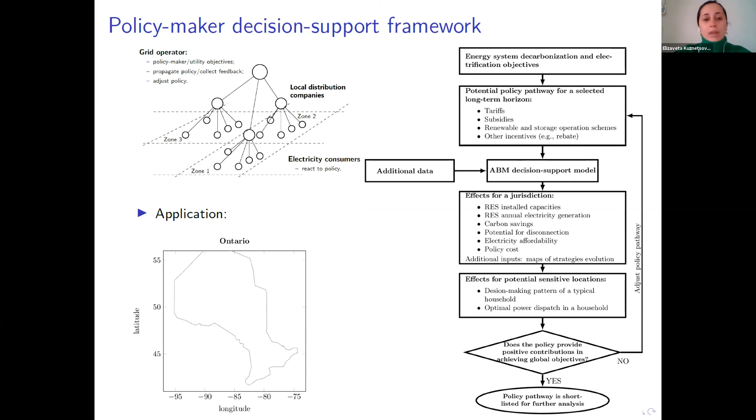For this particular study, we will focus only on the bottom level of electricity consumers, because the policy definitions and adjustments will be done by ourselves manually. The application will be presented for Ontario.

Each household is simulated as an individual agent who uses various inputs, starting from tariffs and the trends of these tariffs for the next years, technologies, and investment conditions.

We have the technical specifications of various technologies, environmental conditions where a household is situated, and operational conditions if we talk about the load profile in the household.

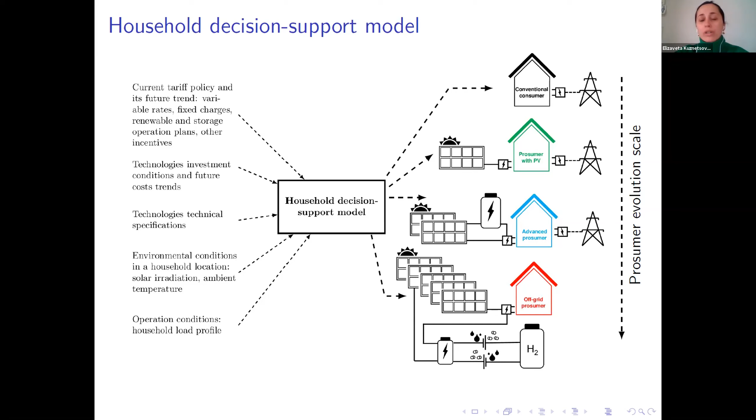In the output, the model simulates the transformation of a conventional consumer into a prosumer, starting from a prosumer with a PV system, then an advanced prosumer with PV and electric battery, and the ultimate decision could be to go off-grid with a larger PV system and seasonal storage based on a power-to-hydrogen-to-power technology.

These decisions are based on an optimization model which aims to minimize the net present value of future expenses. The objective function includes capital investments in various technologies.

We also have operational expenses to maintain these technologies annually, and replacement costs, because at the end of the product warranty, if our technology fails and we cannot repair it, we will need to replace it.

Electricity bill will be paid to the external grid in case our prosumer or consumer operates in grid-connected mode, minus avoided costs, which is the reduction of electricity bill due to self-generation and self-consumption. If our prosumer disconnects, avoided cost will be equal to the electricity bill because it will no longer pay any fee to the external grid.

Our optimization model allows us to simulate a progressive expansion of renewable energy systems, so we can plan the expansions year by year. The electricity bill and avoided cost are calculated based on the optimization model for the optimal power dispatch in the household, depending on what type of technology the household has.

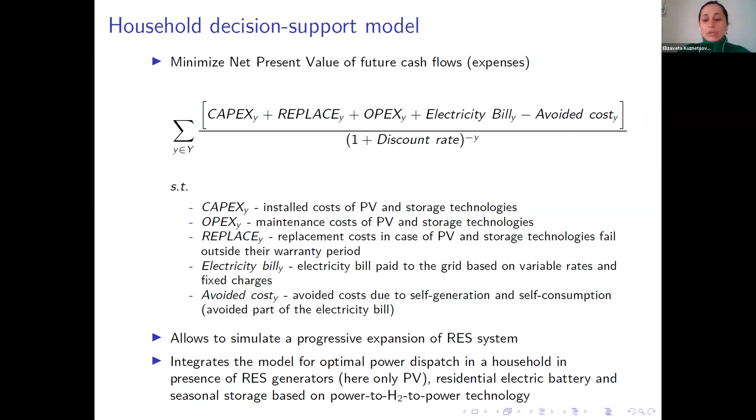How many agents do we need, how many households do we need to model to represent a jurisdiction? Ideally, we need to select this number, so each typical household will be representative of different areas with various tariffs and different environmental conditions.

If we go even further, we can also talk about the difference of appliances used in different households in different regions, so difference of consumption pattern.

For this particular study, we will mostly respect the two first conditions, using the approach currently used by the Ontario Energy Board, where the effect of tariff is evaluated for a typical household in each distribution area. So we will have for Ontario 67 consumer agents representing 67 distribution areas.

These consumer agents will be a typical household with average electricity consumption of 700 kilowatt-hours per month.

Then we ask ourselves a question: will all other households in the jurisdiction behave the same way as this typical household? So we conducted a bunch of simulations for various combinations of different tariff conditions and for households with different average monthly consumptions, and here you can see the overview.

I will not go into details, you can read more in our report, but I will say that this helped us identify the size of this consumption window where households with this average monthly consumption will behave in the same way.

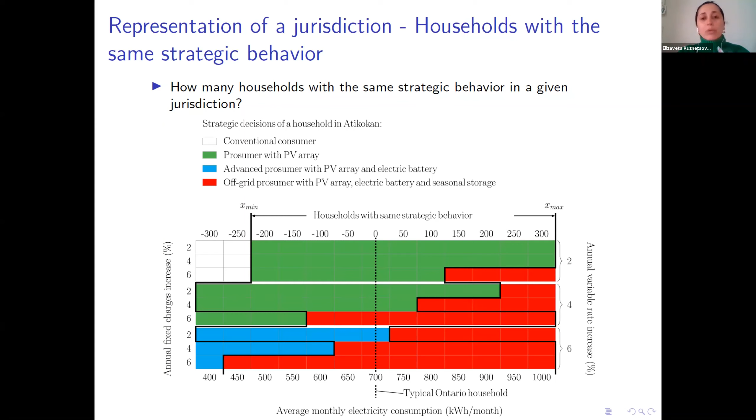Now that we know with which monthly consumption households will behave in the same way, we will probably need to use some measurement data from a jurisdiction. Unfortunately, we do not have access to this for Ontario.

So what we've done is use available probability distributions, similar to what was done for a consumption study for detached houses in Sweden, and also a few measurement data available for Ontario.

We calculated a cumulative distribution function using the size of this consumption window identified previously, and found that around 40% of households in Ontario could have a very similar strategic behavior. This represents over 1 million single detached households across all of Ontario.

So let's start with the application of our framework. Let's first define potential policy pathways we will test here, starting with the major assumptions.

We are looking only at households under a residential tariff plan, heated with natural gas, which is the majority in Ontario. The bill structure shown below will remain unchanged for the next 30 years.

Renewables will be connected under the net metering scheme, and electricity rates will be at their pre-pandemic level, because currently, with all the lockdowns, we observe very high variations of electricity rates.

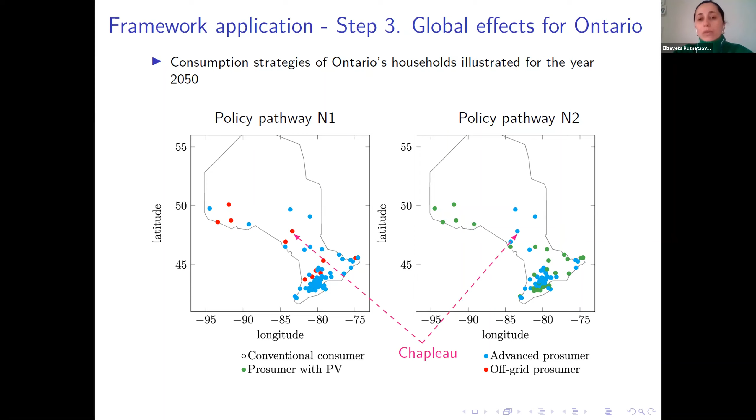For the policy pathway number 2, the situation will be different. Our household will remain connected, deploy some PV generator, expand it a bit, and then integrate electric batteries. So we will use power from the external grid, but at the same time from the PV array and also the electric battery. We can compare the effect of the 2 policies for a typical household in Chapleau.

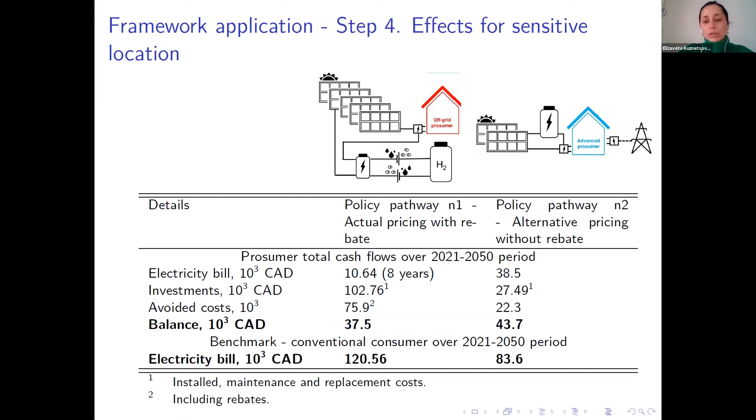So let's summarize some policy implications here. We saw that both policies can contribute to the global energy system goals. However, policy number one can generate some undesirable effects related to system reliability. It may stimulate the disconnection of households in different locations.

And also the first policy can require a lot of investment to pay the rebate for electricity bill. So probably the policymaker could try to define its economic and financial measures closer to policy pathway number two.

So what we can think here is to explore measures to mitigate the total bill increase, for example by acting on variable rates. It can help some distribution companies to diversify their service offer and develop new business models to integrate renewable generation and storage, stimulate the development of these markets, and also involve prosumers in demand response.

We saw that disconnection can be possible with technology based on power-to-hydrogen-to-power storage. So maybe it could be interesting to rethink the use of such technology to keep our prosumers connected, and to integrate this technology in a low carbon hydrogen strategy for Canada.

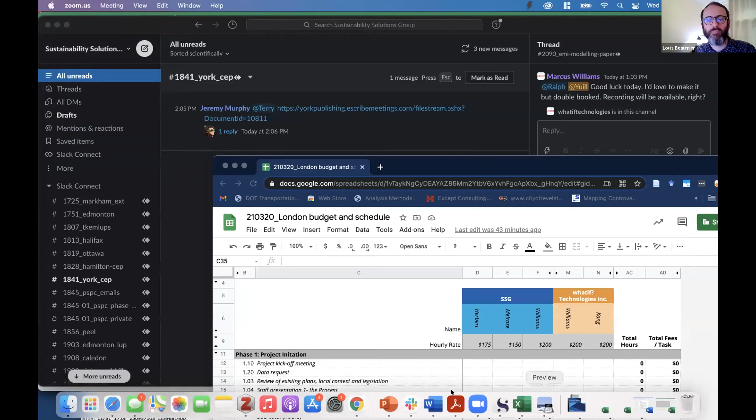Aha, how's that? It's good from my point of view.

We're going to talk about the implications of decarbonization pathways for electricity grids at a high level. We've been doing a lot of work with municipalities across Canada, helping them understand pathways to achieve decarbonization of communities, looking at the energy system as a whole and the built environment within municipal boundaries. This is one example from City of Ottawa.

They had a project called Energy Evolution, responding to a climate emergency declaration passed by the City of Ottawa Council. Our mandate was to identify a decarbonization pathway aligned with 1.5 degrees for the city. We used a spatial model called CityInSight, developed with our colleagues What If Technologies, to develop these pathways, through a very consultative process with community members, advisory groups, and city staff.

Most of the analysis is done on an annual basis. I've put the link to one of these reports on this slide, and this is the kind of result that we generate.

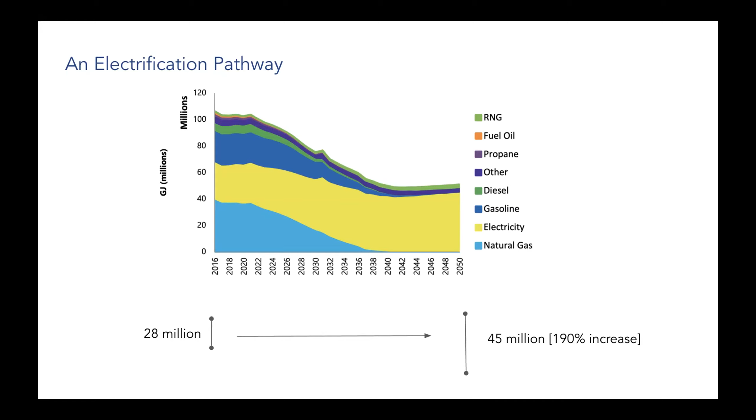Electrification plus one other key ingredient: a lot of efficiency gains. These efficiencies come from a few different areas, retrofits being a core part. We've been arguing that retrofits are kind of the magic sauce that allows us to electrify without blowing the grid up. But that's an easy thing to say when you're looking at the grid in terms of annual energy consumption without understanding peaks.

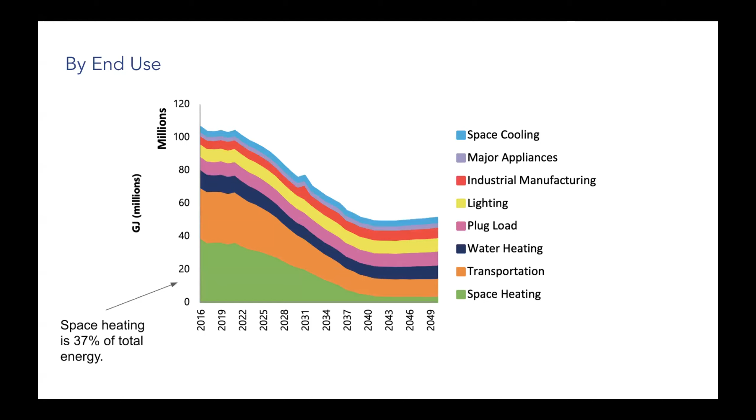This is just a highlight in terms of end use, and you can really see space heating dominates the energy system within City of Ottawa, and is also the major opportunity in terms of efficiency gains, as well as transportation.

Transportation is another area with a lot of efficiency gains from switching from the internal combustion engine to the electric engine. But the space heating gains are a combination of the efficiency of heat pumps, as well as the retrofit package that we implement.

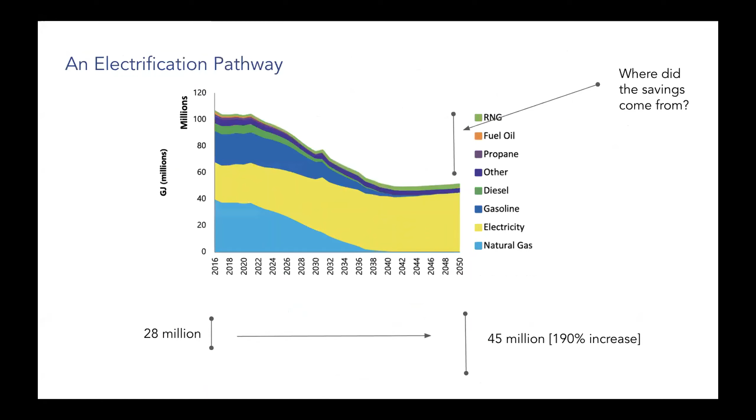As we saw in this slide - I'll just go back here - electricity actually increases from 2016 to 2050.

This is a finding we've encountered consistently across a number of projects with cities in Canada. It's been an important story to communicate to the grids and utilities working in these cities, that overall electricity consumption doesn't increase. But then they immediately come back and say, that's great, but what happens in terms of peaks?

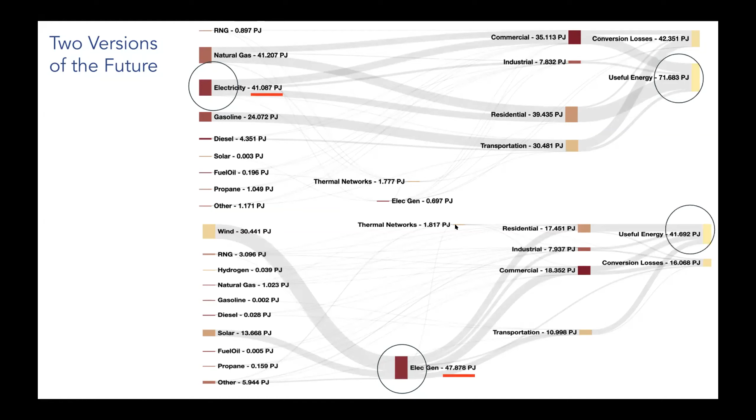I'm just going to skip over that one. Actually, I should highlight that this vision of electrification of the future is a real vision, and we are seeing that play out in a lot of the cities we're working with.

This is an interesting trend just starting to emerge, where cities are actually banning new gas stations. A more common trend is cities banning any sort of gas connections or gas appliances in new buildings. I think Vancouver will be the first city in Canada to implement a similar requirement, though most of these requirements so far are in the US. But the electrification agenda is really driving the low carbon trajectories we're seeing.

I think the general discourse is that the electrification agenda will really drive peaks within the grid, and that would be a common assumption to make. So we were fortunate to have the opportunity to work with a large portfolio of buildings in the Ottawa area to do much more detailed analysis. I'll pass it over to Ralph to introduce some of the insights we've gained from that process. Over to you, Ralph.

Thank you, Yuill. Am I coming through okay? Yeah, great. Hi everybody.

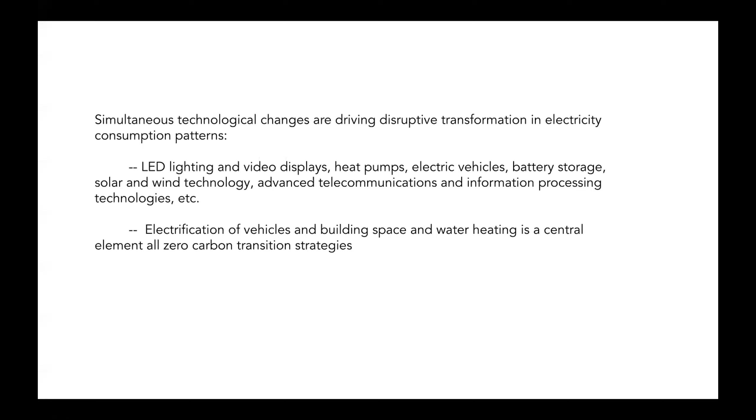The models we're working with simulate in great detail the physical energy-using infrastructure, equipment, and vehicles from the ground up. I'm going to start by showing you a couple of examples right down at the micro level of what that can look like. I'll just jump to the first bar chart.

This is a picture of before on the left and after on the right, of an analysis of a single 30,000 square meter office building in Ontario that had a package of retrofit measures combined with a conversion from natural gas heating to an electric heat pump system in a cold climate.

As you can see, the outcome that Yuill referred to shows up even at this micro level. The gas is gone on the right-hand side. Electricity consumption has increased ever so slightly for this particular building. But in general, if you implement new technologies for efficient use of electricity, new lighting technologies, not to mention the gains in fans and pump savings when transitioning to heat pump systems, the electricity saved from retrofitting the building to a higher level of efficiency will be sufficient to run the heat pump needed to replace the natural gas that was heating the building.

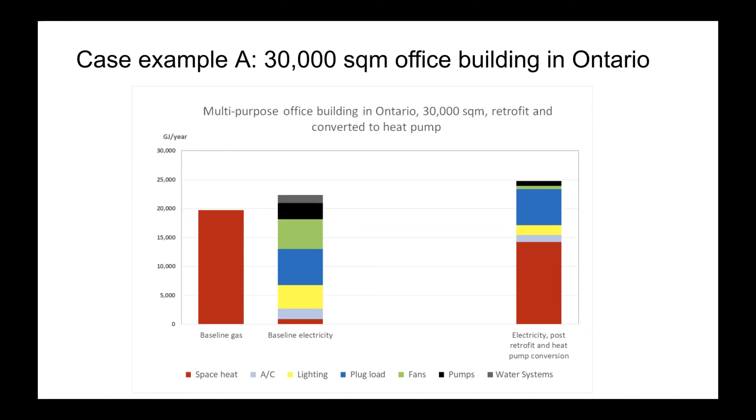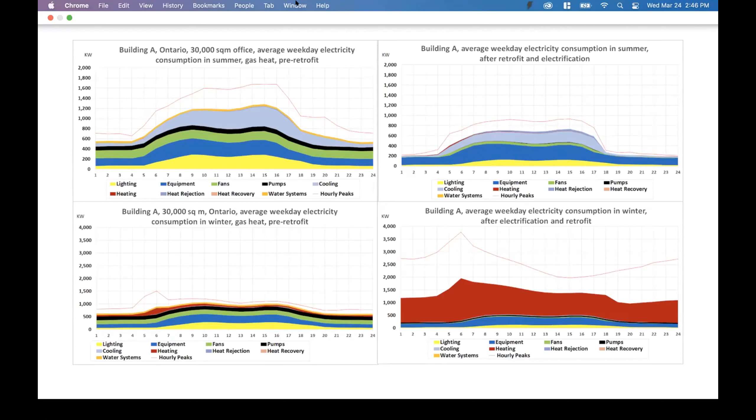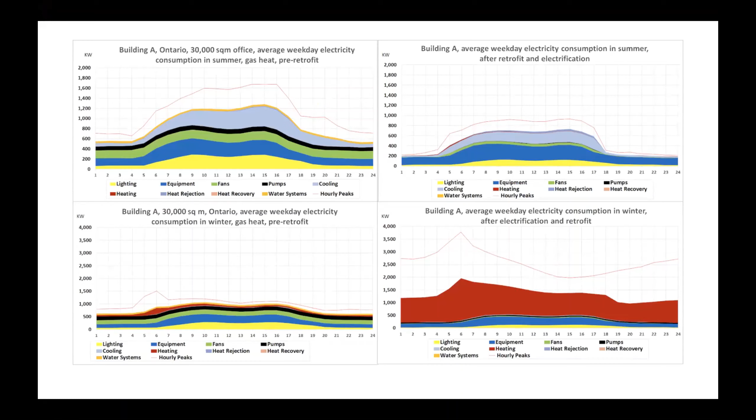We see that consistently, obviously, with the shift from gas to electric heating. Overall demand, however, is not up dramatically. The peak in this particular building, which was a summer peak at around 1,600 kilowatts, is now a winter peak at about 3,500. So that's an example where, yes, there's a very significant peak impact.

Second example I just wanted to show is a very large complex, actually 4 very large interconnected buildings totaling 425,000 square meters, with a combination of gas and electric heating in the base conditions, which was moved over to a pure electric heat pump based system.

Here we see actually at the end of the transition, total electricity consumption has actually come down slightly, even though all of the gas has been traded out and switched out.

One of the things that really helps is if there is any amount of resistance heating in the starting conditions, whether it's a residential or commercial building situation. When you convert that resistance heating, whether it's space or water, to heat pump technology, you get a lot of freed up electricity supply, which is then available to be applied to the transition of any gas heated space over to electricity. I'll come back to that in a couple of minutes.

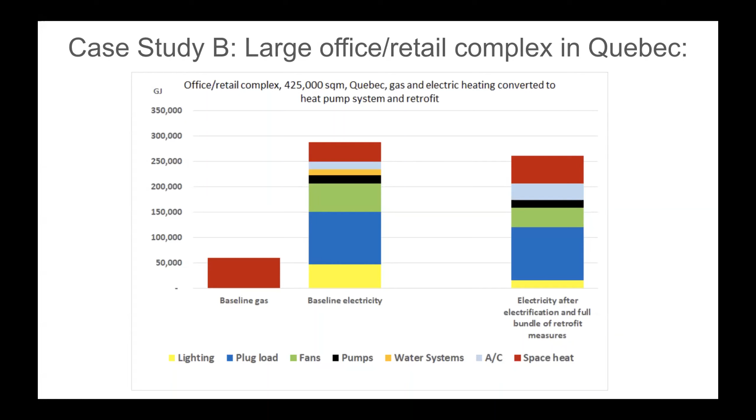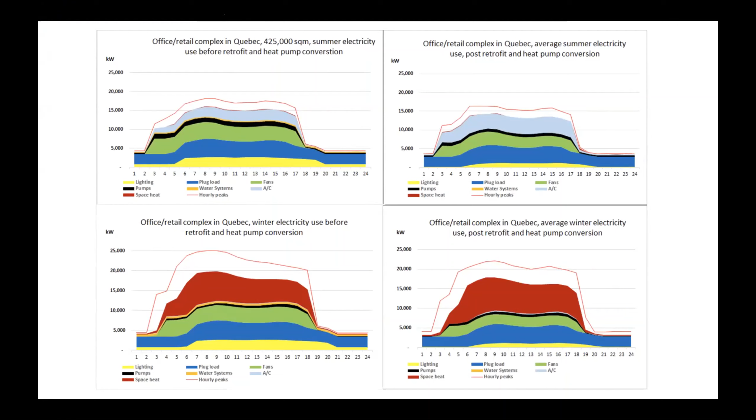Yul, I think, is going to talk a little bit more about this kind of result, and what it starts to look like when you scale it up.

Yeah, so this is the 8760 for 3 scenarios. The baseline is the red in the background. The green is an electrification scenario only without doing a building retrofit, and the yellow, which we call mountain caribou -- we named all our scenarios after creatures -- knocks those peaks down pretty significantly.

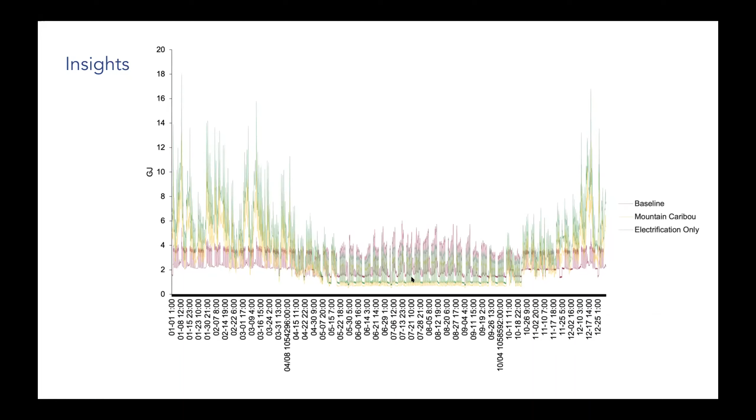So I think part of the case we're trying to make is that without retrofits, the electrification agenda becomes much more complicated. But clearly, here's some quick impacts: the peak shifts to the winter from the summer in the middle, and the retrofit shifts the whole curve down. So those are the 2 big trajectories.

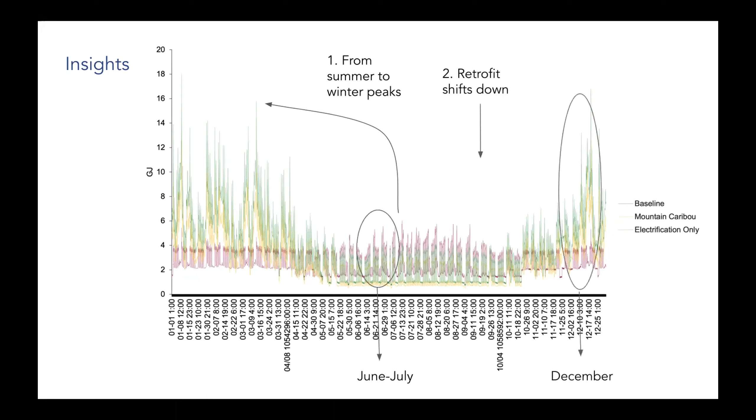If we go to the summer, this is where we get a lot of the benefits. The retrofit really knocks down the electricity peaks, and that's because the air conditioning load decreases. So the red is the baseline and the yellow is both electrification and retrofit.

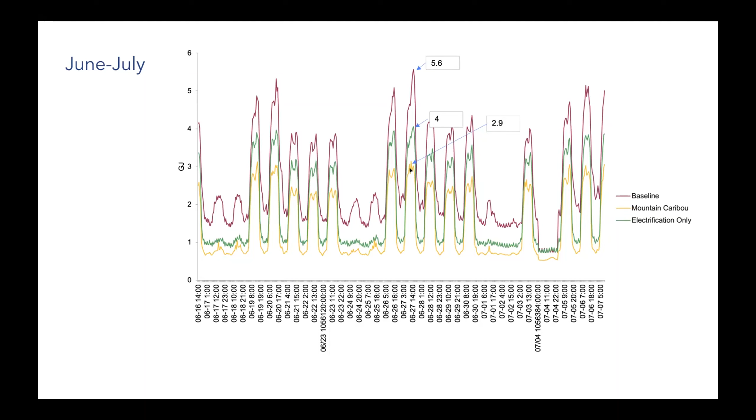And if we look at one day, June 27th, you can see how the curve is shifted down, really driven by the efficiency of the heat pumps and the retrofit.

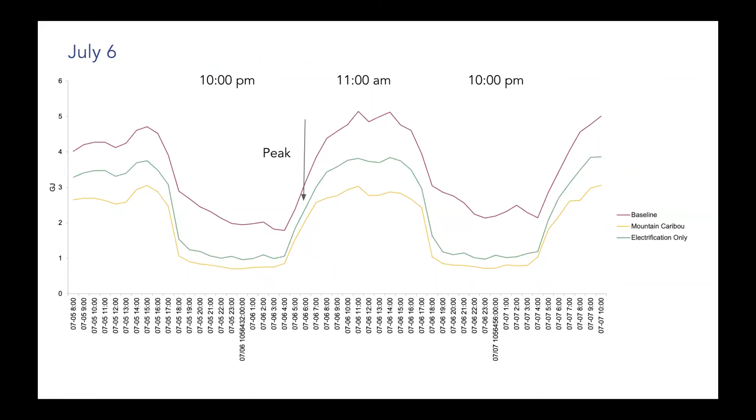However, there is a significant peak increase that we saw for this particular building, but when you bundle a whole bunch of buildings together - almost 100 natural gas heated buildings, same kind of analysis in the city of Ottawa - the peak impact is much less significant. And that's because there's a mix of some electrification or electrically heated buildings and also the profiles of the buildings.

So that, I think, was a really important finding - that when you electrify and retrofit a whole building stock, the impact on the grid is much less significant than when you look at one building.

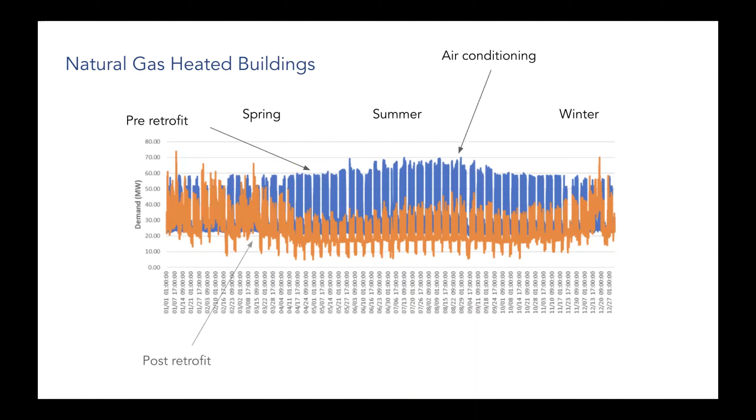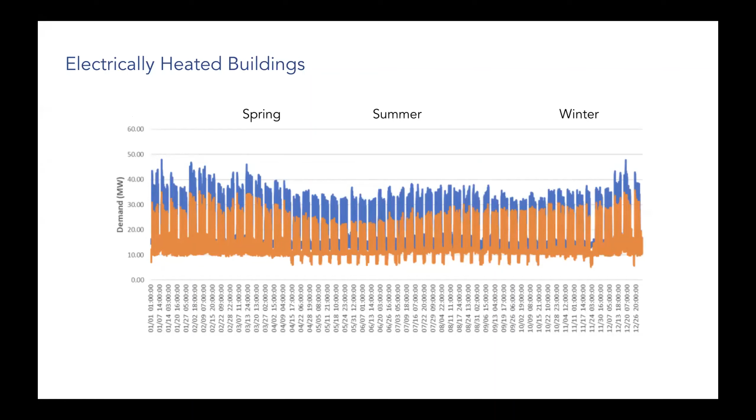Then this is a sample of just electrically heated buildings from the Quebec side. In this case, it's just peak reductions because you're switching from electric baseboard or electric heating to heat pumps. Back to you, Ralph.

Well, just one last little section here, switching over to the residential context. This little infographic is really just an attempt to illustrate the interconnectedness of the efficiency and the electrification of transportation and the introduction of heat pumps and so on, and the way that they work together to decarbonize.

The top is represented by these 4 houses. One is heated with natural gas - actually 3 are heated with natural gas, and 1 is heated with baseboard electricity. They all use lights and appliances at typical Canadian levels, and they all have one car that goes about 25,000 kilometers a year at around 9 liters per 100 kilometers.

You end up with total electricity use of 200 gigajoules in this hypothetical, although the numbers are realistic. The total greenhouse gas emissions from this cluster of 4 houses is 60 tons if the electricity supply is at 100 grams per kilowatt hour, which is higher than a lot of Canadian provinces and well below Alberta, Saskatchewan, and Nova Scotia. But I chose 100 just so you can scale it in your own mind.

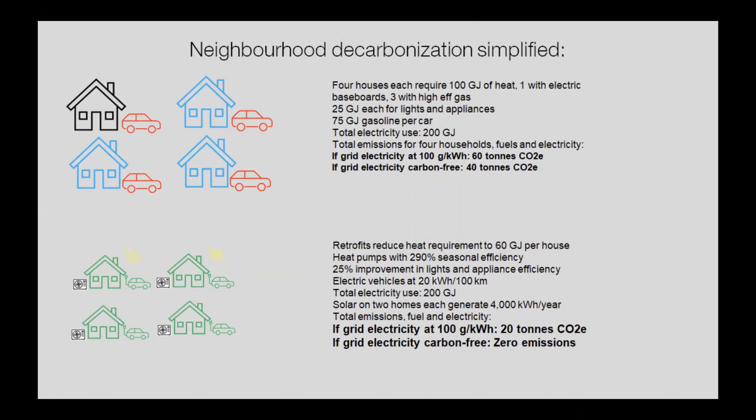We've electrified half the personal vehicles in the province. We've more than doubled the share of residential and commercial floor space heated with electricity, combined with phasing out resistance heating. And we've retrofit the stock down about 43% for residential and 36% for commercial buildings in terms of thermal efficiency. Do all of this together, and you have a much better chance of getting to a carbon-free grid that can supply it, than if you only do heat pumps without retrofits, or only electrification without efficiency more generally.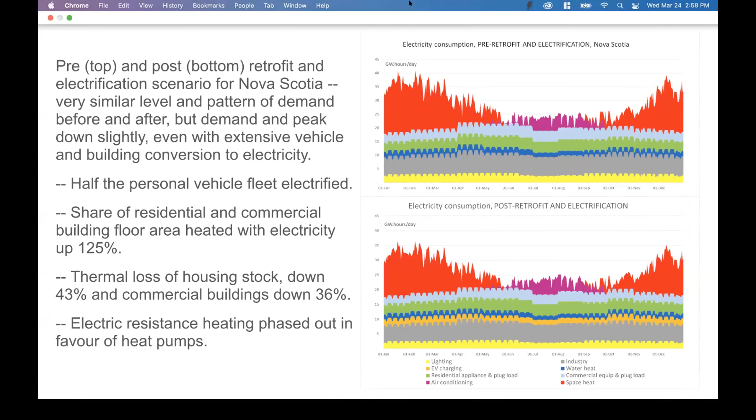So that's really the central message I'd like to put out there for my colleagues to consider in your work: the importance of a whole systems, integrated approach.

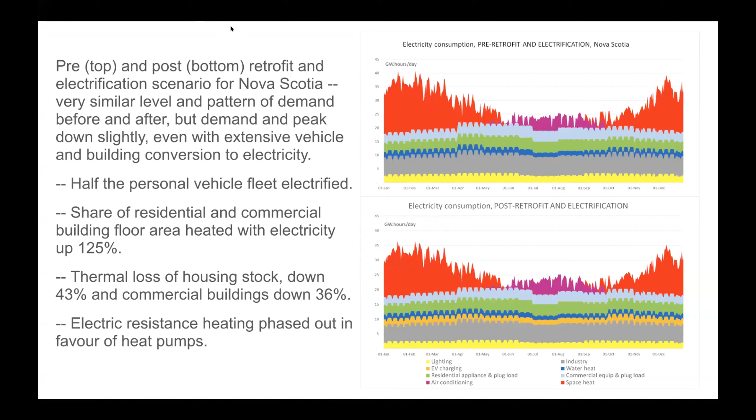The last slide really just sums up points we've already made. I'm just checking if there's anything here that hasn't been said. I don't think so, although the electric vehicle, we've only scratched the surface of what it's going to mean for the transformation of energy systems.

The idea of having this much storage, which is portable, we've barely started to get our heads around the advantages that presents for how we manage and run our electricity distribution system. When you can move electricity around with millions of portable batteries, it could become a fairly important contribution at the community level to balancing the system. Even at the household level, most of the electricity in the EV battery is not going to be used on any given day, and it's a significant amount compared to household consumption. So we think the EV is going to play a much bigger role than we've yet even imagined in how neighborhood electricity supply and demand plays out.

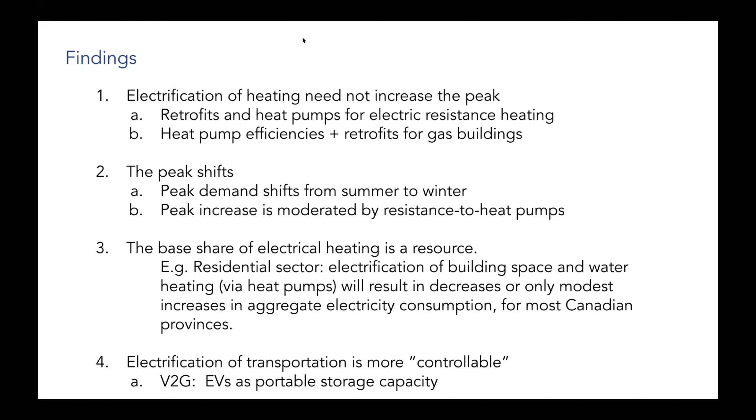There's one last slide, but I'm not sure there's too much on it. Again, it's just re-emphasizing the importance of the interconnections between efficiency, electrification, and decarbonization. The counterpart is that our business strategies and policies also have to be integrated. If you try to optimize on electrification, or if you try to optimize on efficiency alone, you're going to make a mess of things.

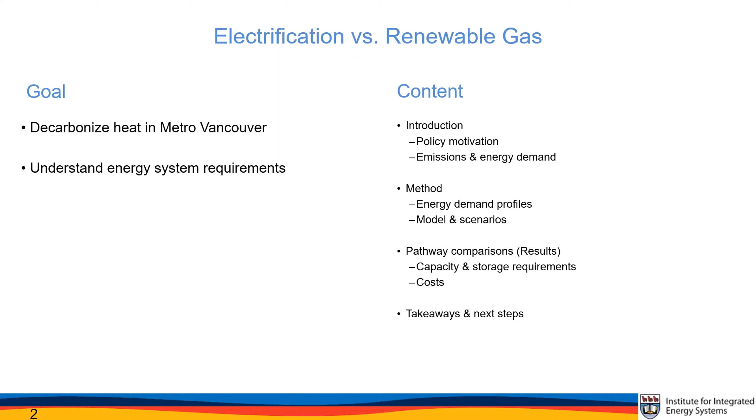The greenhouse gas policies are in place at all levels. British Columbia wants to reduce emissions by 80% by 2050. Metro Vancouver wants to be carbon neutral by 2050. The City of Vancouver wants to use 100% renewable energy, up from about 31% today. So the incentives are there to decarbonize.

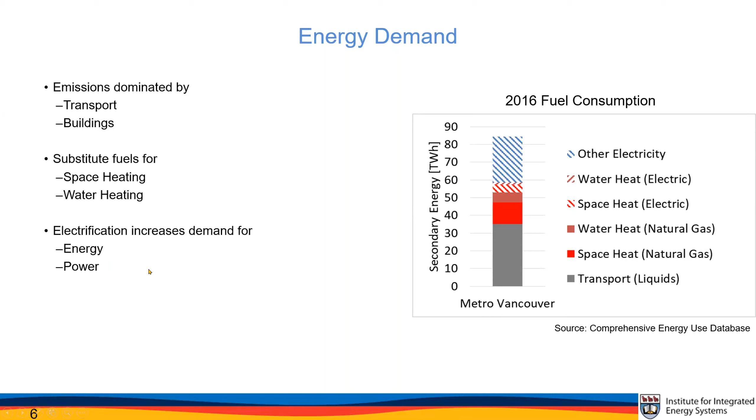Now, one of the options to do that is obviously electrification, which increases the demand for energy and power. Now, we know that there is surplus energy in BC available. The amount of surplus power is actually quite difficult to determine. And just around BC, 91% of the electricity in BC is produced by hydropower.

Approximately one-third of that energy can be dispatched on a flexible schedule. And the reason why it's not more than that is because BC is constrained by the freshet water inflows in early summer, by flood control, by keeping the rivers at certain temperatures. It's a complex system of other constraints that are not directly only related to producing electricity.

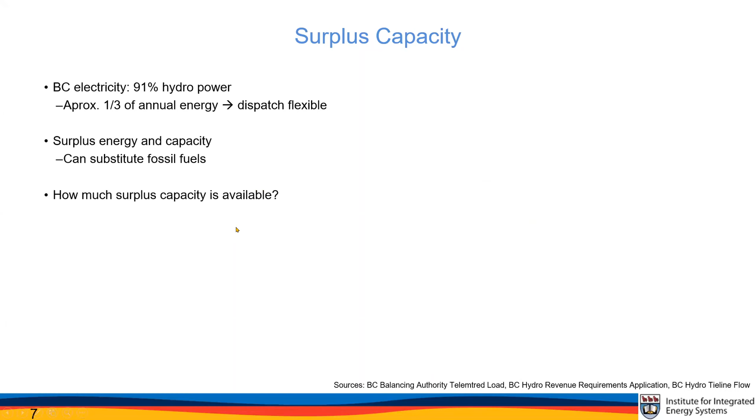We know that surplus energy and capacity that's available now can substitute some fossil fuels, but it's not quite clear how much surplus capacity is really available. And the reason is that the boundaries between the data sources differ, and there's insufficient data documentation.

So I want to show you on this graph the problem with these different data sources. What we see here in the red line on top is BC Hydro's 2018 effective load carrying capability based on their revenue requirements application. And you can see that this line just exceeds the green line here, which is the all-time peak balancing authority load. So it looks like the load in British Columbia is almost as high as the load carrying capability, which means that, well, if the green line exceeds the red line, that's a bad thing.

The problem here is that this is actually based on two slightly different data sources. BC Hydro's load carrying capability is based on BC Hydro as an electricity supplier, but BC Hydro doesn't supply all electricity in British Columbia. There are other smaller suppliers.

The load is based on the balancing authority. BC Hydro acts as the balancing authority in British Columbia, meaning it's responsible for balancing load and demand in real time on the integrated transmission system. But the balancing authority and BC Hydro are still not the same entities, and this is why the two data sources don't necessarily match. The boundaries around those data sources don't necessarily match.

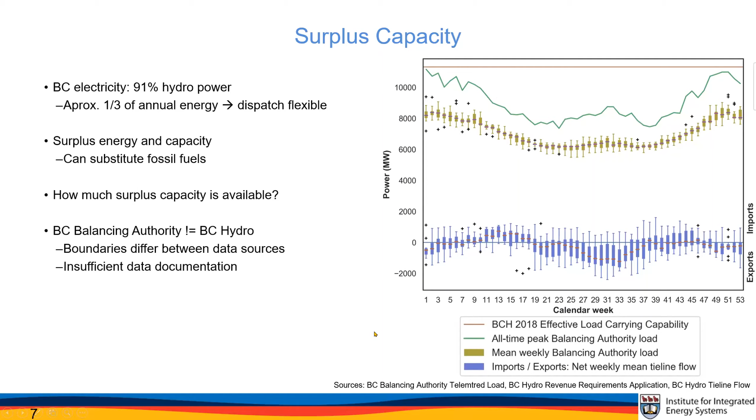In terms of energy demand, when we replace fossil fuels with renewables, we need a good understanding of what the hourly demand profiles look like. So we created space heat, water heat, and electricity demand profiles based on different data sources, because getting hourly demand data is actually quite challenging.

The water heating demand is based on a tool from Ontario. The water heating demand doesn't fluctuate much when you compare summertime and wintertime. But that's different for the space heat demand.

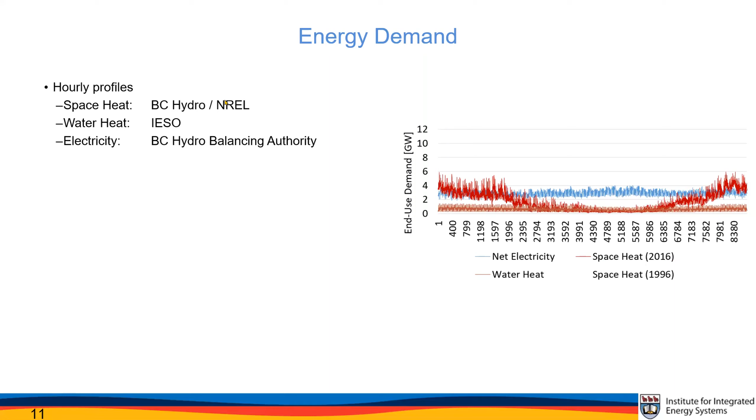The space heat demand we created is based first on BC Hydro residential demand data. We got data for 5,000 households in British Columbia that allowed us to deduce the space heat demand in 2016. But the problem was that 2016 was not a particularly cold year, and we wanted to investigate what happens if there's a cold snap and we need to design the system for a cold period.

So we did temperature regression analysis, taking the 2016 heat demand and creating a regression with 2016 recorded temperatures in Metro Vancouver, producing an equation of best fit, then applying that to temperature data for other years. We found that 1996 had the lowest minimum temperature recorded in the data set in Metro Vancouver, minus 16 degrees that year, and that year also had the third highest number of heating degree days. So we applied this regression analysis to 1996 temperature data and produced this space heat demand profile.

You'll see immediately that the peak demand here is much higher than using the 2016 profile. But there is some considerable uncertainty around this demand profile. The key here is that the peak at the end of January for about a 5-day period exceeds BC Hydro's current load carrying capability, just below 12 gigawatts. Everything in these plots is scaled to Metro Vancouver, basically scaled from BC to Metro Vancouver by 53%.

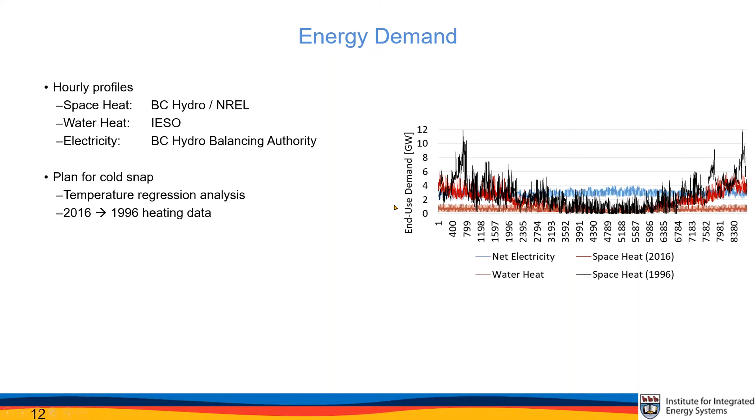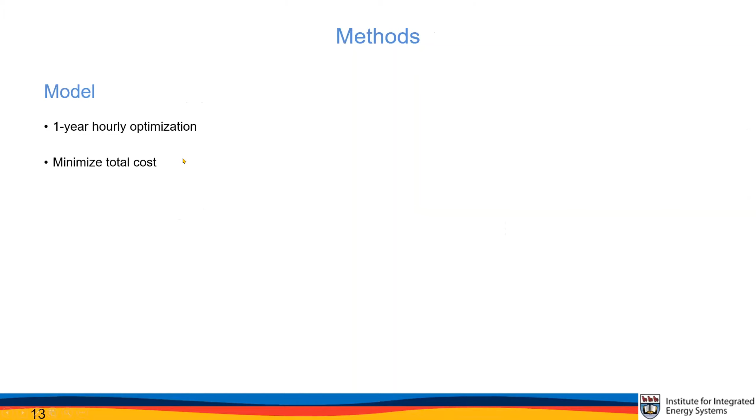I'll briefly talk about the model. The energy system model we use is based on the open source energy system model OSeMOSYS. We've implemented a 1-year hourly optimization. OSeMOSYS is a linear capacity expansion and dispatch model that minimizes the total cost of the system for this 1-year period. But the model has to supply all energy demands, which in our case are electricity, space heat, and water heat.

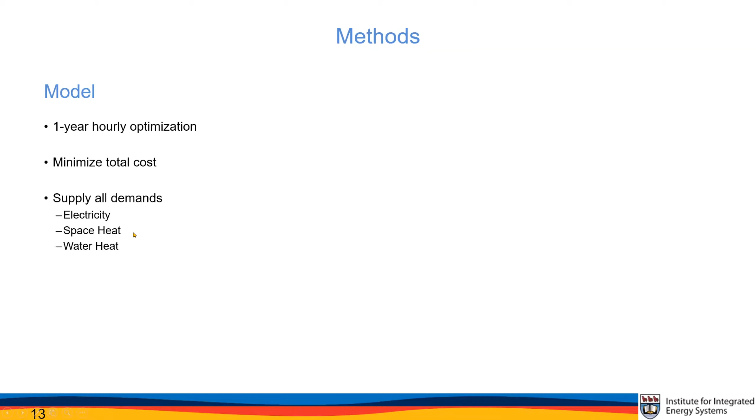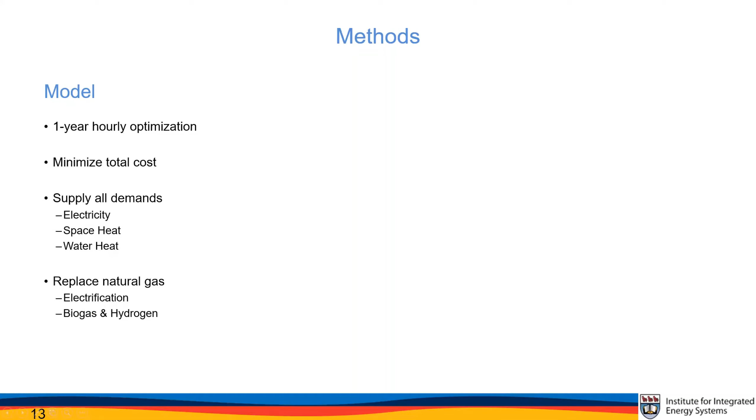And it has to do so by gradually replacing natural gas in increments, either via electrification, replacing gas furnaces with heat pumps to reduce natural gas consumption and use more electricity, or the system can use biogas. But there's a limited supply of biogas, and when that runs out, the model can install electrolyzers to use more electricity to produce hydrogen. If the model needs more energy, it can install wind, solar, storage, and electrolyzers in order to produce and store that energy.

The scenarios we devised are designed to capture some uncertainties. I'm not going to show you all the scenarios we implemented, we implemented a much larger range, but I'm going to focus on 2 different scenarios.

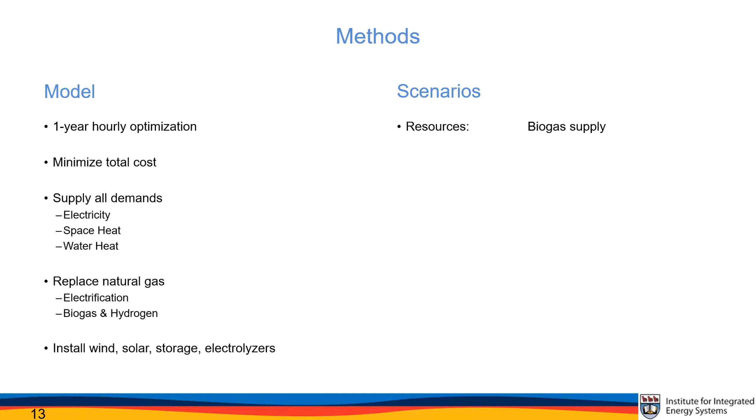In terms of resources, we had a lower and a higher estimate for biogas supply. The lower estimate is the amount of biogas needed to reach the mandated 15% of gas supplied from renewable sources by 2030, and the higher end includes an estimate on wood gasification that would increase the biogas supply in British Columbia.

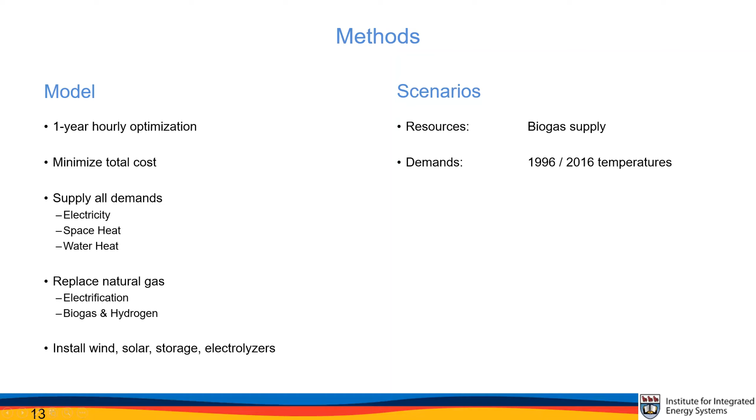In terms of demands, we only compared these 2 demand profiles: the 1996 profile, which has the higher space heat demand, and the 2016 temperatures, which has the lower space heat demand. So in terms of results...

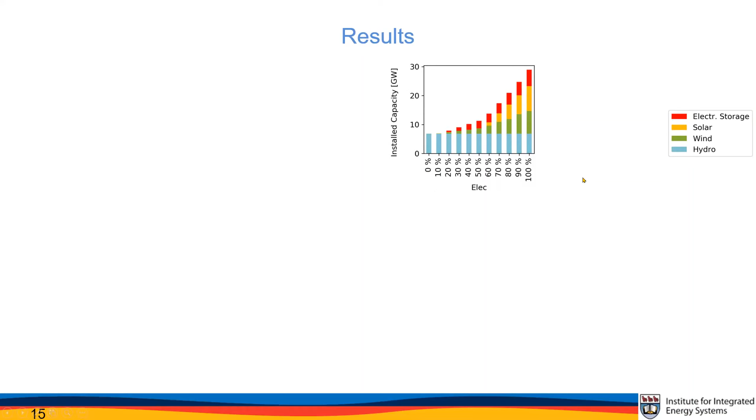Now I want to focus on the energy capacity, the storage capacity. What you see here is the installed capacity in terms of electricity storage, but the energy capacity of this storage actually varies quite a bit between scenarios. These whiskers delineate the range we see across all scenarios, and electricity storage ranges from 4 to 80 gigawatt hours - that's quite a big range.

80 gigawatt hours would be equivalent to 8 pumped storage facilities just to electrify the heating system. The reason this range is so big is really driven by the peak space heat demand we see in the 1996 temperature space heat demand profile, where the demand exceeds the load carrying capability. That's really what drives this.

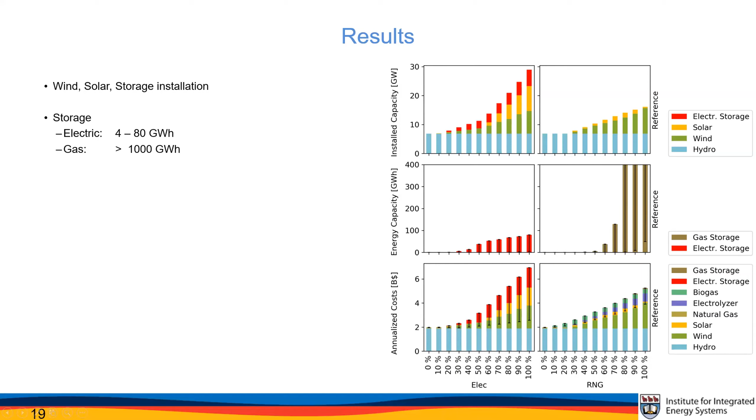You can see again that these whiskers delineate the range of costs we see across all scenarios. What I want to focus on is this very large range we see in the electrification pathway versus the smaller range in the renewable gas pathway. Again, the reason is really the storage driven by peak demand exceeding hydro's load carrying capability. In the renewable gas pathway, this is actually driven by biogas availability.

Biogas is lower cost than hydrogen, and that's why the cost drivers in the renewable gas pathway are biogas availability. I should note that the costs included here are just gas and electricity production and storage. It does not include things like retrofitting heaters - if we were to switch our furnaces to heaters that consume hydrogen, that would certainly need some change in that technology.

That's not included here. I'm also not including transmission and distribution costs, and especially upgrading costs for both gas and electricity transmission and distribution.

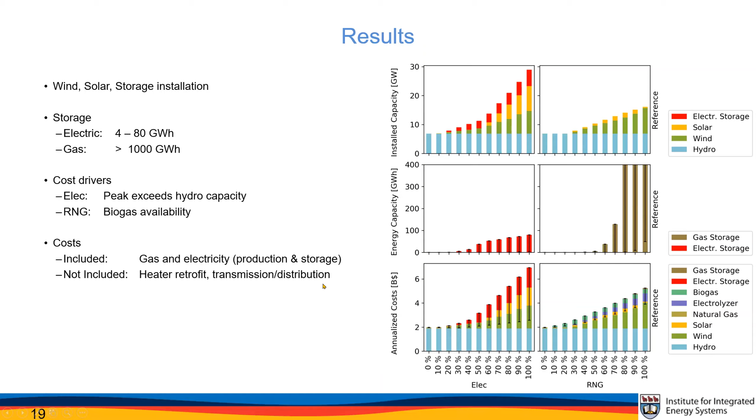The takeaways from this are, first of all, I want to point out that these are preliminary results. Really what we wanted to see is what drives these costs and what drives the storage requirements in order to be able to focus our attention on where we have to improve our estimate and our data availability to improve this analysis as a whole.

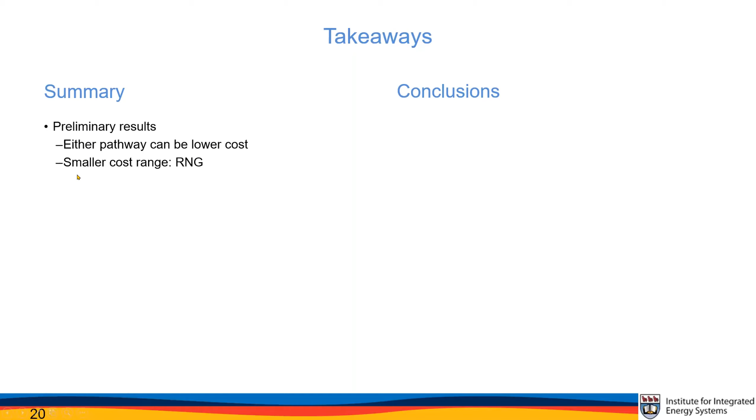The preliminary results show that either pathway can be lower cost, but the cost range is smaller in the renewable gas pathway. The biggest cost drivers here really are the peak demand that exceeds hydro's load carrying capability. So if we need to supply demand for an extended period of time while there's no other dispatchable capacity alternative available, then electricity storage would need to fill in, and that's really not feasible.

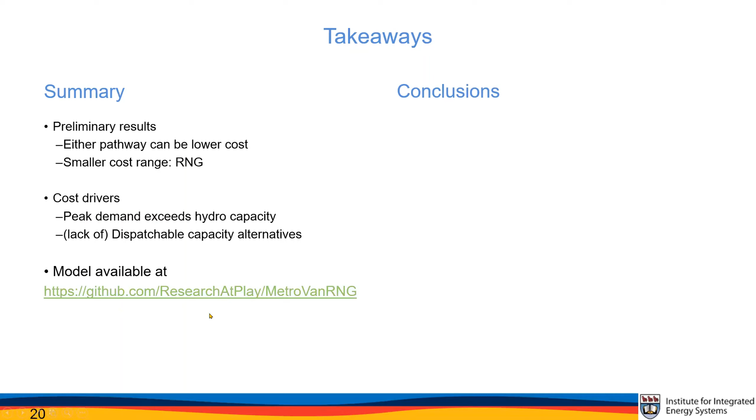The model is available at this link, so you can download it and play with it.

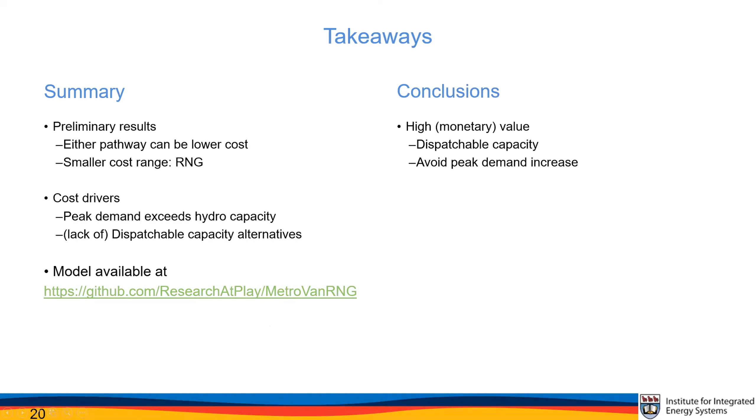The conclusions we can take away here are that dispatchable capacity has high value, but avoiding the peak demand increase also has high value. And I want to be careful with this conclusion: maybe it's better to electrify summer peaking sectors. Because we already have a winter peaking electricity demand, adding to it by electrifying the building heating sector may not be the best use of the available capacity and energy if other sectors can reduce emissions at lower cost using that energy.

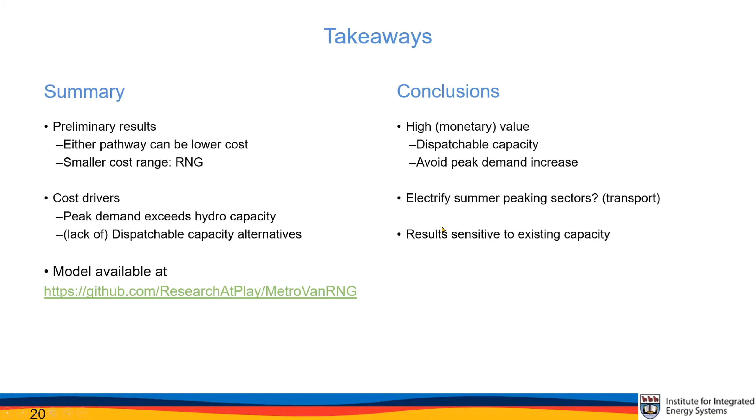The results really are sensitive to the existing capacity. So this is something we need to focus our attention on as we go forward.

Our next steps are to improve that available capacity estimate, improve the demand profile in terms of impacts of energy efficiency improvements. One comment we've often received is that we need to include efficiency improvements, especially for the building step code. We can't just assume that retrofitting buildings will have energy savings.

We need to improve our scenario assumptions in terms of stakeholder connections.

I just want to make sure that I'm still audible. Can you still hear me? Yes, now am I still? It's better, we lost you for maybe 20 seconds. Okay, sorry about that.

I'm almost at the end. We're getting stakeholder comments that we need to investigate the operation of the coupled electricity and gas system in terms of its resilience. We want to investigate pathways to net zero emissions, and we want to include a spatial analysis in terms of where to put the electrolyzers and which corridors need to be upgraded in terms of electricity and gas transmission.

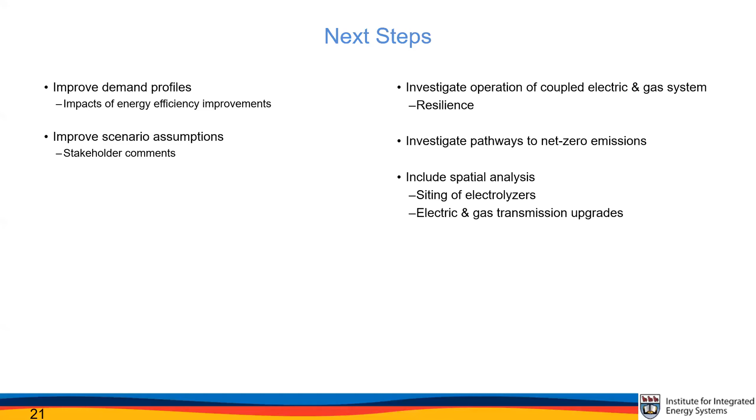I was wondering though whether you had looked, for example, at the potential for heat pumps to reduce your winter peak. You said electrifying heat, but a lot of your heat is already resistance heating in BC, and couldn't you reduce your winter peak by converting that? My other question was whether you looked at the potential for decentralized storage via vehicle to grid systems. There's going to be a lot of electricity in EV batteries on any given day that's not going to be used for anything else, so just wondered if that's on your radar.

The efficiency we used for these heat pumps was temperature dependent. I don't have a slide on that here, but the coefficient of performance ranges from about 1.4 at the coldest temperature, minus 16 degrees, to about 2.8 at the cutoff of 18 degrees centigrade, where no heating is longer required. That's not what we're seeing in the field from the latest generation of cold weather heat pumps. We're seeing at 0, 5 above 0, around 3.4, 3.5, and at minus 20 we're still getting 2.0.